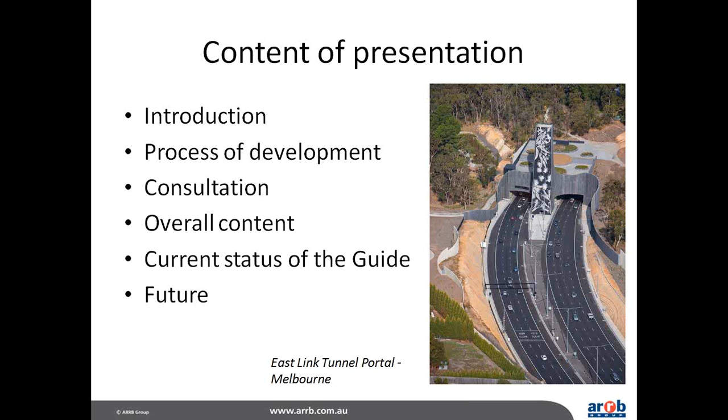There's a picture of the East Link Tunnel portal in Melbourne - it's quite a striking design, intended to make a statement about the significance of the tunnel the driver is entering.

The presentation is intended to provide background to the development of the guide, including the reasons for it, how it was developed, what the guide contains, its status with the road authorities, what is intended for the future, and how you can provide feedback.

The guide was necessary because there was no national standard to provide uniformity of approach to tunnel design, even though there was major expenditure by authorities on tunnels. It was necessary to establish a common approach that doesn't need to be negotiated for each tunnel as it arises, and it's useful to have a convenient source of information for practitioners.

In addition, there were issues that had arisen in the implementation of various tunnels, and various difficulties had been encountered. For example, there were structural difficulties with the Boggo Road Tunnel in Brisbane, where cracking in the lining occurred, and some problems with leaks in the CityLink tunnels in Melbourne.

In addition, some had high maintenance requirements, with high variability in things like the spacing of escape doors. In environmental requirements, banning of portal emissions appears to be a wasteful approach and needs some rationality put into it. It was also necessary to resolve the status of the land above the tunnels and what can be done on that land.

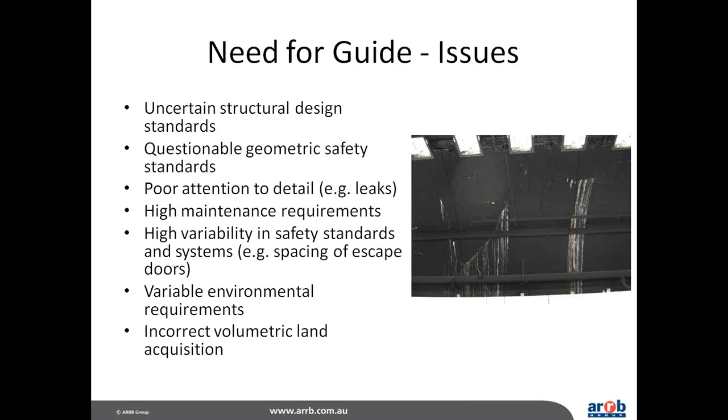The major purpose of the guide is to define acceptable standards for tunnels to be implemented by Austroads members. It was therefore necessary to make it useful for practitioners at all levels. However, the guidance is at a high level, not a detailed level, and it is not a manual. But it is the intention that various people will be able to determine what standards to adopt for particular tunnel designs when they arise.

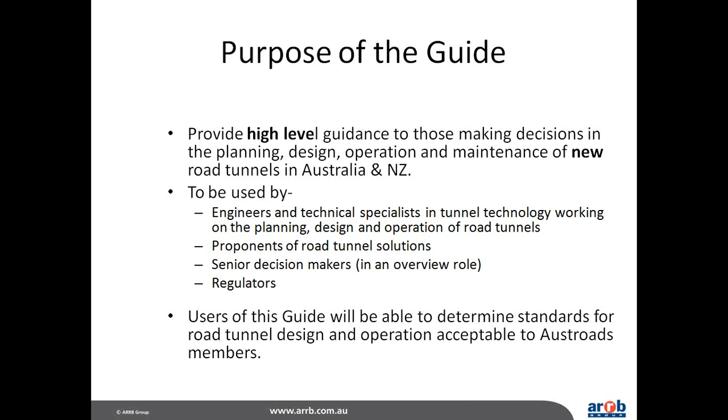In developing the guide, a tunnel technology review panel was set up, which Matthew was one of the members. It covered all the states of the Commonwealth. ARRB is represented, the Commonwealth Government. New Zealand was represented, as well as the local government in Australia. A comprehensive literature review was undertaken, examining learnings from other projects, and we had significant input from a range of organisations and people, three of them listed there. Some industry specialists gave us input as well, I'll talk about that later, and they also provided some writing in some cases.

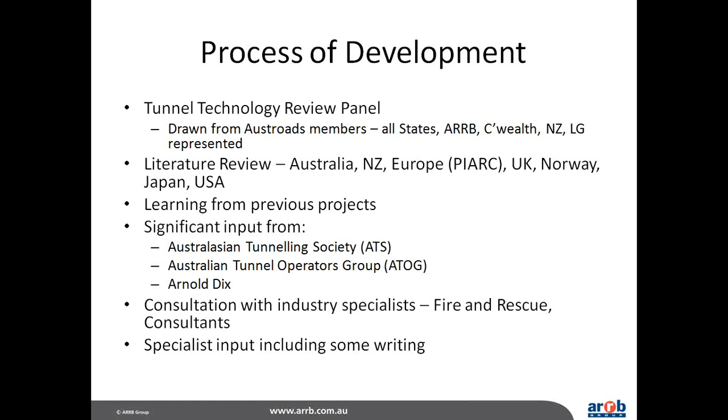Of course, the process was a normal one for these things: you prepare drafts, get comments, revise them, review, and revise as many times as needed to get agreement. It was reviewed by the panel, of course, but in addition we had an external review by Arnold Dix to get further expert opinion on the quality of the work we'd done.

In consultation, you have to remember that Austroads is not the same as other Australian standards bodies. They don't go through a public comment stage, but input from industry and others is sought. Apart from the technology review panel, which included various experts and specialists in the various authorities, about 40 other people external to that provided their expertise for the development of the guide, including the Australasian Tunnelling Society, Australian Tunnel Operators Group, and the Australian Fire Authorities Council. City North Infrastructure was a special body set up in Brisbane which no longer exists. Robert Bertuzzi, a specialist in geotechnical issues, gave some valuable input, and of course Arnold Dix, who was a member of PIARC committees. PIARC is a permanent international association of road congresses and is a European-based organisation.

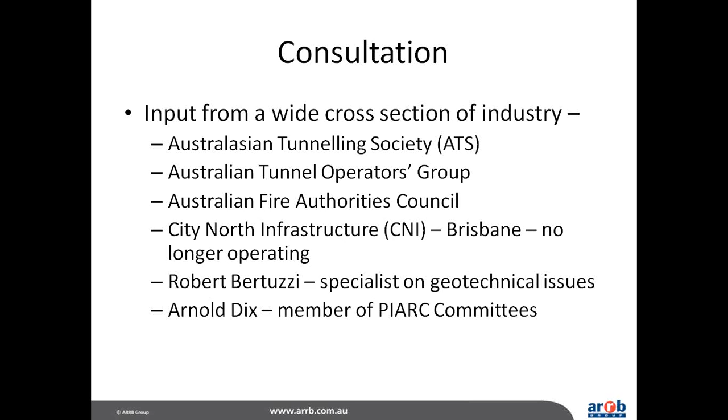That's a bit of light relief. This is the longest road tunnel in the world, at 24.5 kilometres long, with 3 caverns like this to break up the journey. While white light is used in the tunnel, additional yellow and blue is added in these caverns to give the impression of daylight.

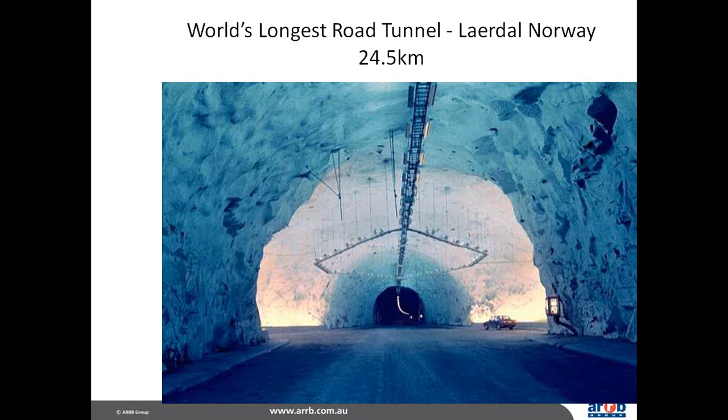No worries at all, thank you Les. Something I'm interested in knowing is you mentioned before that obviously there were a lot of people consulted in the process of developing the guide. What's the process for industry or other parties inputting into or changing the guidelines? So Matthew, perhaps would you like to take this question?

Sure, thanks Angela. Yes, the process is essentially that we'll take submissions at any time, so that's a process of contacting ARRB if you have any particular questions, and the tunnel technology group still meets on around about a 6-monthly basis, and we'll take into consideration any questions, insofar as we are looking at updating guidelines at a reasonably regular interval, and as part of that update we would consider anything that people would want covered in more detail or clarified.

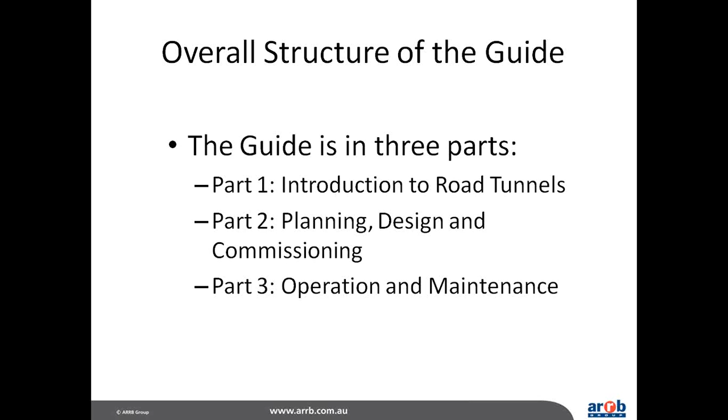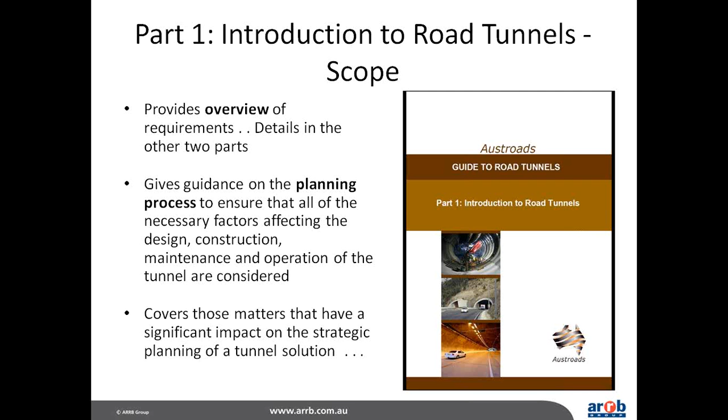In part one, the introduction to the road tunnel, the scope is a general overview providing definitions and general requirements. It sets the scene for the other two parts, gives guidance on the planning process to ensure all necessary factors are taken into account, and covers matters relating to strategic planning of a tunnel solution. There's a heavy emphasis on using risk management techniques in this and other parts of the guide in developing a tunnel design.

Note this part is very general with few specifics - those are in the other volumes where applicable. It identifies all the issues to be considered and relies on the expertise of practitioners for detailed technical input. There's no attempt to address construction issues other than identifying the importance of the construction method on design requirements. I have two pictures of two construction methods - the tunnel boring machine was commonly used in Brisbane, and the road header commonly used in Sydney.

Matthew wants to comment on that - yes, that's just on the basis of geotechnical conditions essentially. The road header tunnels, the TBM tunnels in Brisbane, are lined and waterproof, giving a very good quality tunnel. In Sydney, the sandstone is a very good tunnelling material for road header, very structurally sound, and you can save a lot of excavation by simply cutting out the shape needed for the traffic and services.

Traditionally for a tunnel up to 4 or 5 kilometres in length, the road header seems to be the way to go in New South Wales. This may change in the future depending on the total length of tunnel - I think the longer the tunnel is, the more efficient a TBM approach may become.

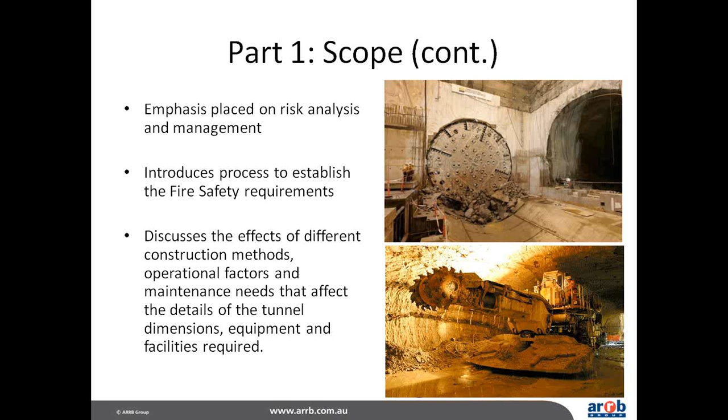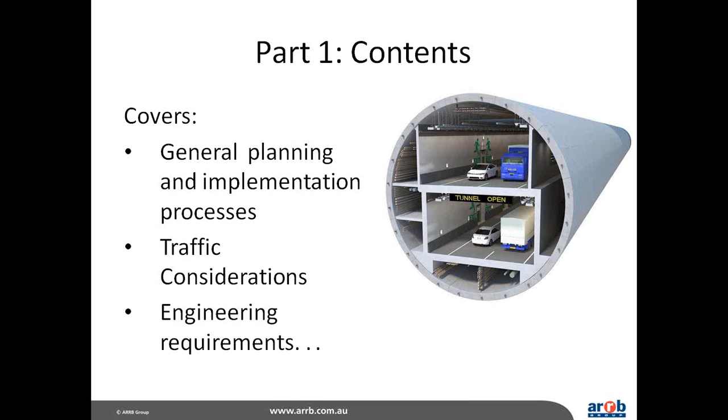In part 1, there are 12 chapters altogether. 9 of those cover the general planning and implementation processes, traffic considerations and engineering requirements. That's just a general picture to whet your interest - we haven't seen one of those in Australia. The other 3 chapters are functional safety and operations, environmental considerations and construction methods.

There's a commentary, and you'll note that in the Austroads guide, the main text provides essential information defining standards and other requirements, while additional background information and detailed explanations are provided in commentaries. In this part, there's a commentary on types of tunnel construction.

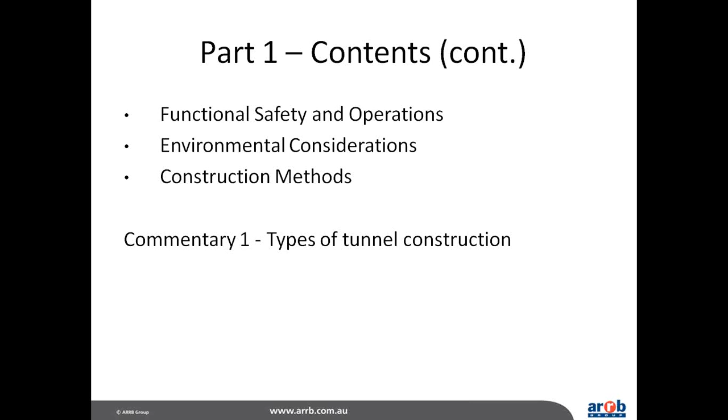Just a sample from the text of part 1 - this is the road tunnel implementation process in general terms, showing the range of time that it takes. I don't know if Matthew would like to comment on that. I've got nothing really to add there, Les.

Okay, well, it does add a very jurisdiction-specific approval methodology and approval requirements, dependent on each jurisdiction, I guess. It's also very much funding dependent and financial modelling dependent, so that's one thing we can't go into too much detail on.

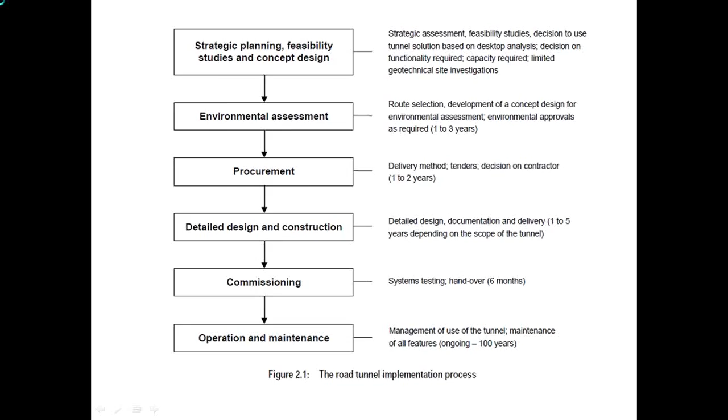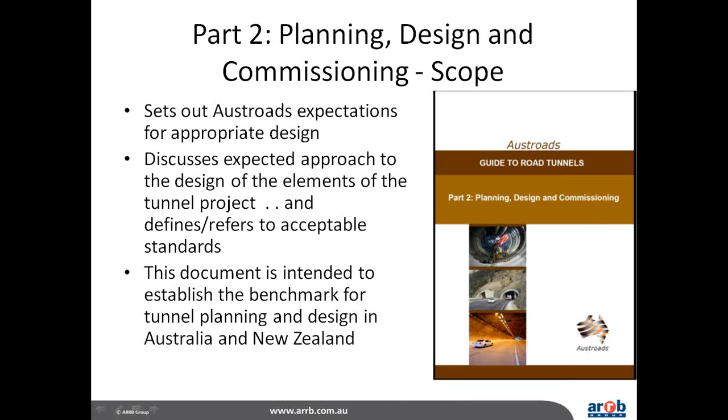We need to note that this current guide does not deal with the refurbishment of existing tunnels, nor the retrofitting of components to existing tunnels. It does describe the commissioning phase and the requirements therein. It should be noted that tunnels are evolving, and therefore this is not intended to be an exhaustive treatment of road tunnels. We'll talk about the refurbishment issues later on.

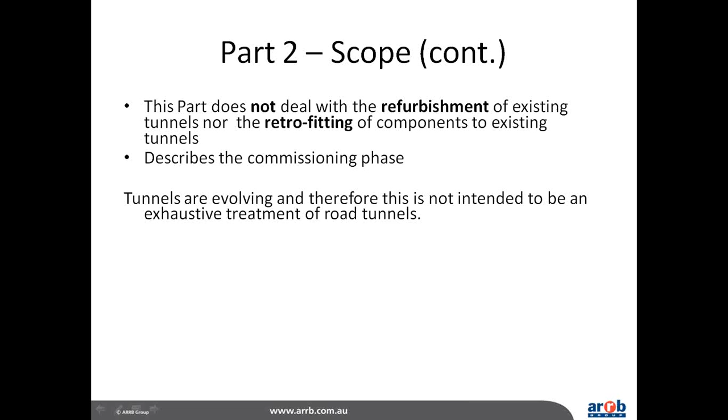This is an illustration of a special example where tunnel techniques were applied to the access to the Sydney Opera House - an interesting project. It's still a tunnel type project, even though not the normal type of road tunnel.

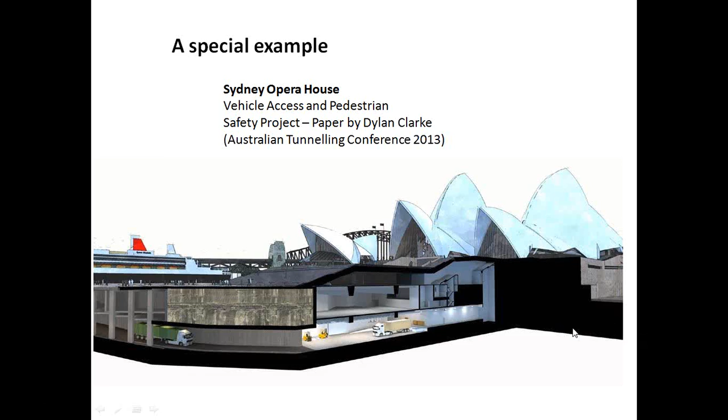The contents of part 2 - there are 15 chapters in part 2. The first lot of chapters include the general design requirements, the civil engineering design, environmental, safety, fire safety, mechanical and electrical engineering design, ventilation, lighting and power supply.

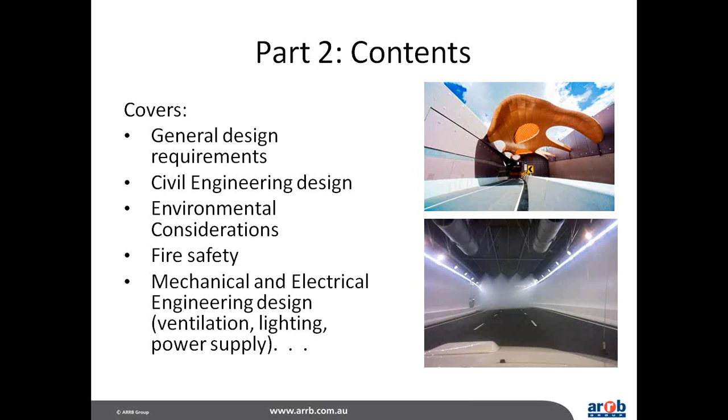There are a further 4 chapters after that, but here are just a couple of illustrations from the guide. This is one on ventilation design examples, showing an idealised concentration profile, etc. There are a range of those in the guide.

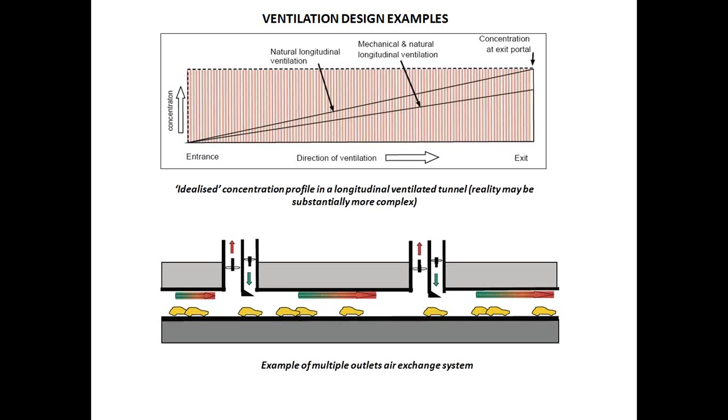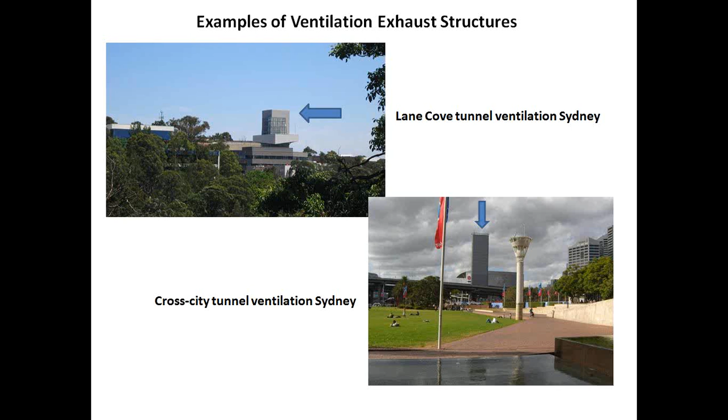An illustration of ventilation exhaust structures in Sydney - I think these fit in with the local environment pretty well. You might come to Brisbane and see how they make them stand out from the environment instead.

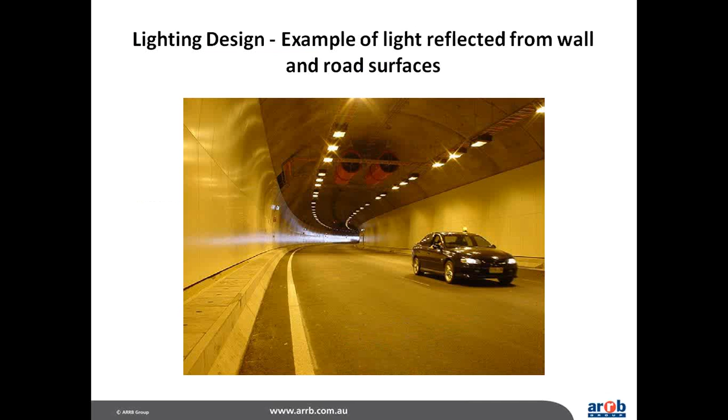An example of lighting in a tunnel and reflection from the walls to provide a good driving environment.

The last 4 chapters of part 2 cover monitoring and control requirements, the services building and plant rooms needed, some construction issues, and the tunnel commissioning. There's an appendix with details for horizontal curves and sight distance, which can be an issue with tunnels.

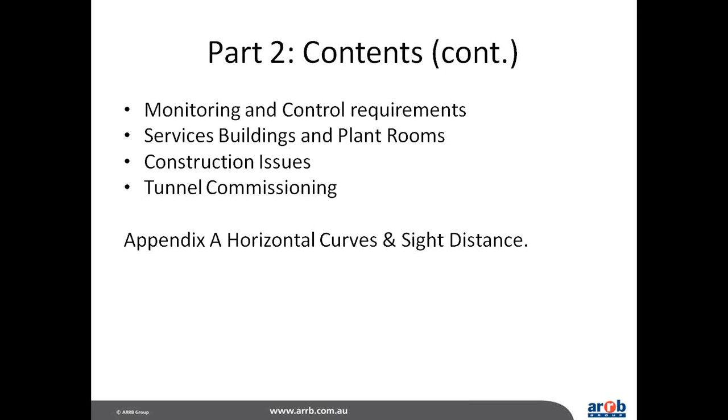Just an indicative tunnel services building showing the range of things that need to be provided. There's no intention that all buildings would look like this, but the functions have to be provided for wherever these are supplied.

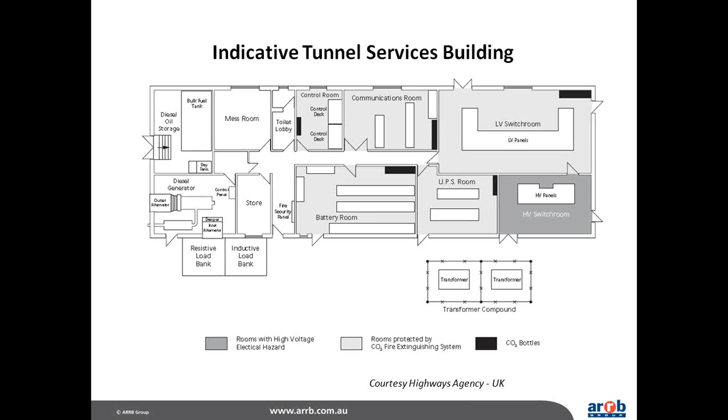An illustration of the portal to Lane Cove Tunnel in Sydney. It illustrates the requirements to give the driver a clear picture of what they're moving into, perhaps encourage them that it is safe. You'll note the lighting in the tunnel shows clearly there's a left-hand curve as you're approaching after you enter. There's signing giving warnings to drivers, and the straight approach allows the whole situation to be fully summed up by the driver.

Have any comments on that one, Matthew?

I think it's a good illustration of how complex portals can be in construction. There was a lot of work put into keeping the Gore Hill Freeway open during the construction phase, with ramps to Longueville Road and ramps to the Pacific Highway, both on and off ramps, which makes it an extremely complex construction activity. They did a terrific job and managed to keep the traffic moving in all cases, and we've got a product that works really well in the end.

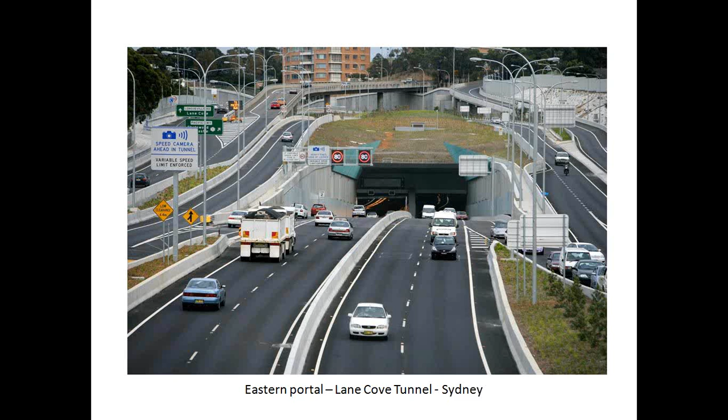Hey, thanks for that.

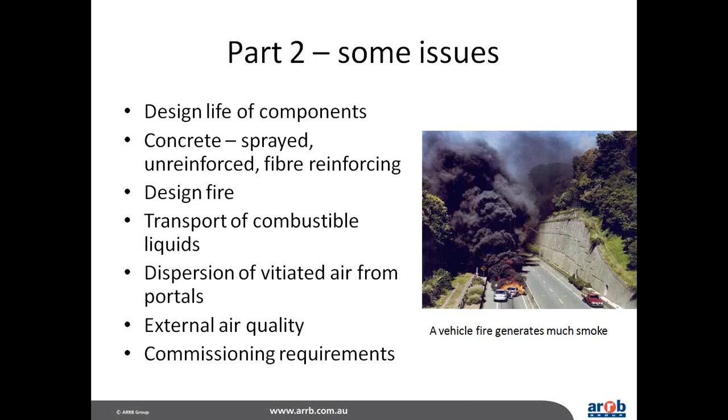Further issues are what level of sophistication is really required for control systems, electrical requirements for regional tunnels and low traffic tunnels. In other words, how many bells and whistles do you really need? And another thing, how much live loading above the tunnel on the surface can you allow?

And you need to know whether you want to make it. So the question arises, are we pricing tunnels out of the market? I don't know whether Matthew wants to make any comment on that.

In terms of tunnel construction going forward, for example in Melbourne and Sydney at the moment, it's very much a function of fitting it into the existing landscape. So you need to allow for the fact that you're working in a brownfield site. Live loading above tunnels is certainly an important consideration if you've got to go under existing structures and buildings. There might be opportunities to build things on cut and cover tunnels, and obviously you need to plan ahead. You need to make decisions on whether you want to allow for development on top of your tunnel in the future. If so, you'll have to make allowance for that, and that's as much a planning question as it is a road tunnel design question.

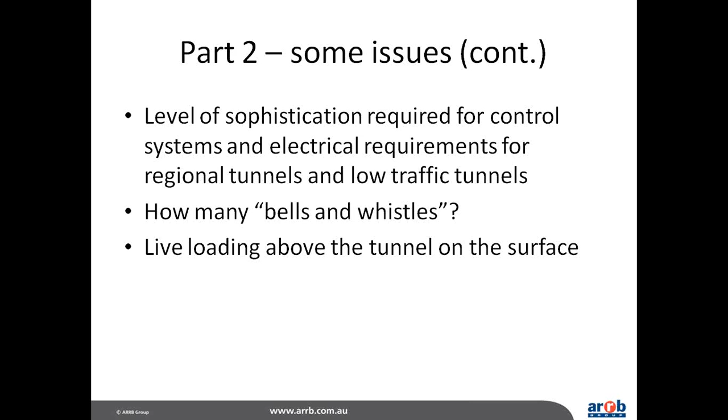Any further questions? Yes, thanks Les. We have had a couple. I might go with this one first. Thank you, Mike, again for your question. So Mike refers to the flowchart that was earlier in the presentation.

The question reads: the flowchart a minute ago mentioned the usual compliance requirements, for example environmental impact, etc. Does the guide include any general guidance on improving sustainability outcomes in the planning, design, construction, operation and decommissioning? References to ISCA, which is the Infrastructure Sustainability Council of Australia.

Who'd like to take that one? Yeah, okay. The guide is fairly broad on that because that is very much a changing feast at the moment. It's very hard to determine.

Essentially, we started writing these guides several years ago, and already there's been significant changes in attitudes towards sustainability in the marketplace, and it's becoming far more prominent. It's far more important in terms of energy use. Ventilation systems are a really good example, and Les mentioned portal emissions before.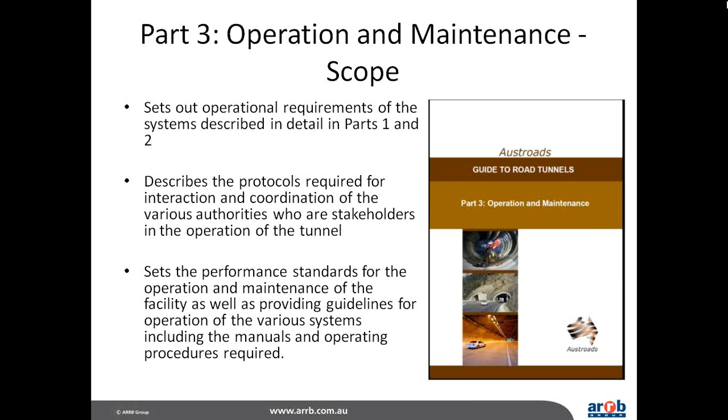I've just listed here all of the contents of Part 3. I couldn't generalise it to any great extent. It has the general requirements and the specific operations requirements, some general maintenance approaches. The human factors is an important part, of course, in tunnel operations, because how will people react when there's an emergency in the tunnel? These have to be taken into account. The training of the people involved in the operation of the tunnel is extremely important, and of course the environment in which they operate has to be dealt with.

Just an illustration there of one of the things in there, an example of the tunnel closure treatment, utilising boom gates, signals and signs. Not very clear on there, but it's in the guide.

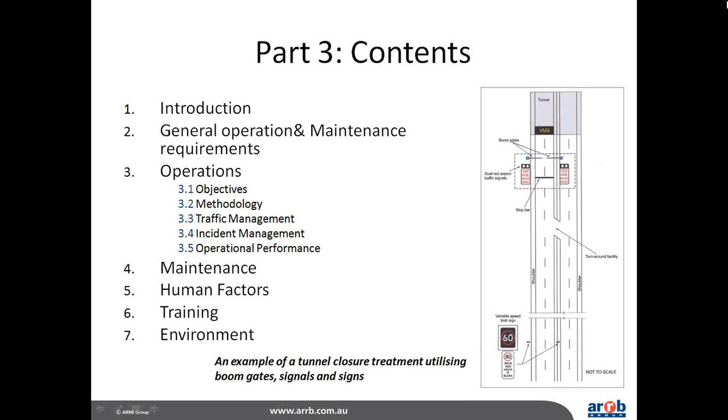Okay, the current status of the guide. Part 1 was published in July 2010, Part 2 in November 2010, Part 3 in August 2010, and it's now the adopted guide for all state road authorities. Within Austroads, the policies allow for individual authorities to produce supplementary guidelines to further explain what's in the Austroads guide, or to specifically identify particular local requirements. I'm only aware that New Zealand has produced a supplementary guide for this one. In terms of the future of the guide, Part 2 revision is underway, expected to be completed in the next financial year. There is a proposed Part 4 which will deal with the refurbishment of existing tunnels, and I don't have any idea of a timetable for that.

Now, as mentioned already, Austroads and ARRB welcome feedback, either corrections to what's in the manual or additions, new information, and the feedback can be sent to these addresses: Austroads at austroads.com.au or info@arb.com.au.

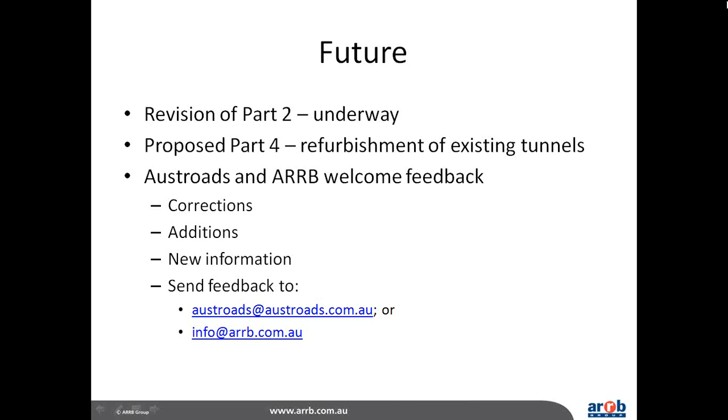Well, what we've tried to show today was the intention of this publication. We've been trying to get uniformity of practice in Australia and New Zealand. The guidance provided is general in many areas, partly due to the rate of change of technology, and Matthew's already discussed that before. It's not a textbook on tunnels, unlike some other people who have produced such things.

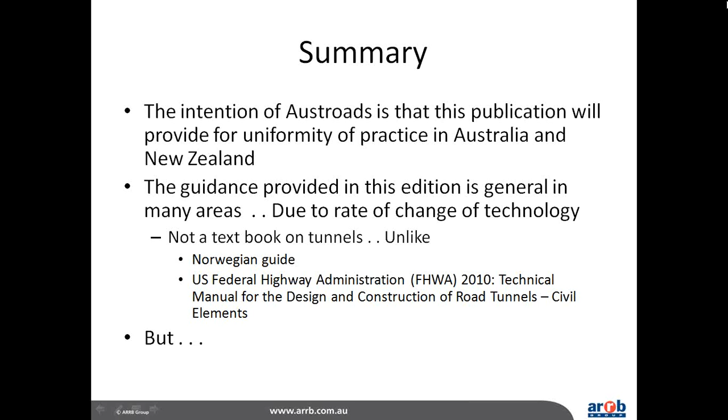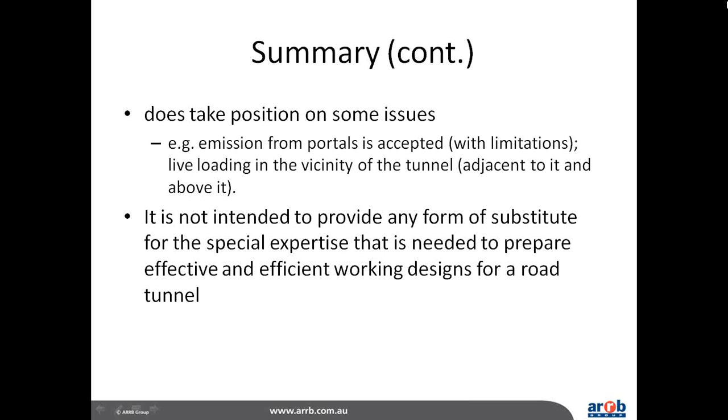The Norwegian guide is an example, and the US Highway Administration Civil Elements Manual is quite comprehensive. But it does take a position on some issues, such as acceptability of emission from portals in a managed way. Live loading in the vicinity of the tunnel, adjacent to and above it, is dealt with, but it's not intended to be a substitute for the special expertise needed to prepare effective and efficient working designs for a road tunnel.

This has been a pretty general webinar today, so we're asking the question about what more detailed training or webinar subjects you would like to participate in and should be available.